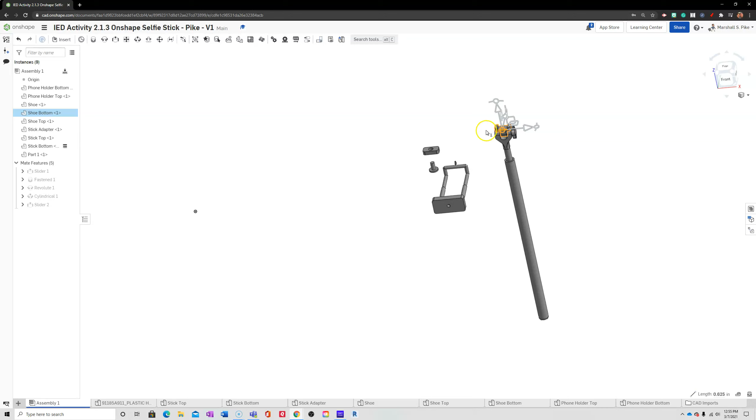We're going to put the pin into the shoe bottom, then attach that to the phone holder, and then attach that entire component to the actual phone shoe bottom up on the selfie stick. For all three of these mates, we'll use the fasten mate, basically attaching surface areas to one another. So I will turn on the fasten mate.

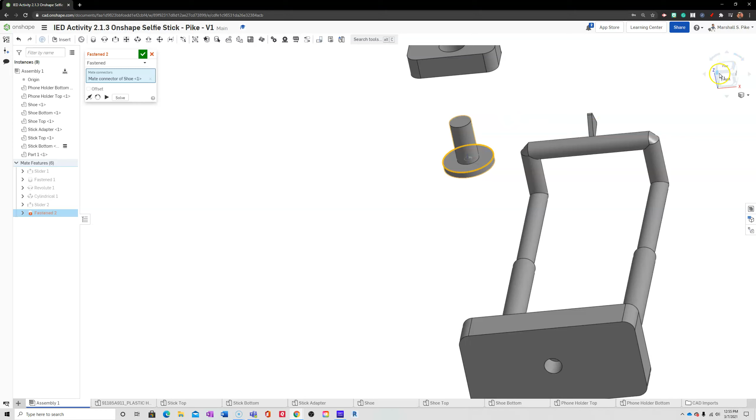I'm going to zoom in and find the pin with the bottom of the surface area, and then I can rotate my object over. Let's zoom in again, and I want to find that area, but make sure I get the surface area of that shoe bottom, not the actual hole that's inside. If I hover over that, it will attach itself and highlight for you.

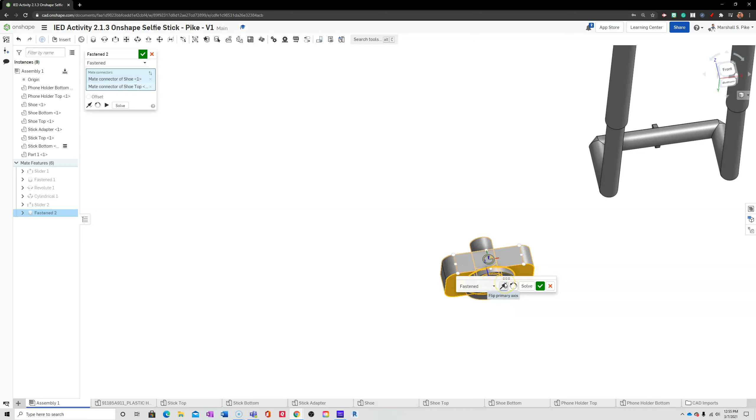Once I have that in place, for level 1 we're doing something different. We're going back and selecting mates continuously for practice. So I will go back up to the quick access toolbar.

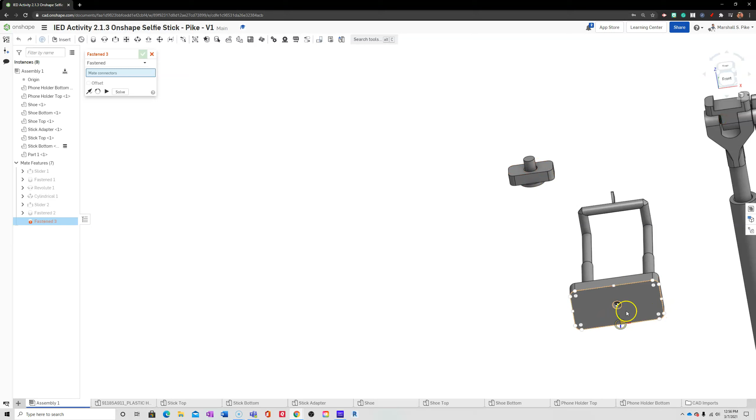I will select the fasten mate, and this time I want to put the pin that's inside the shoe bottom into this part of the phone holder. So I'm going to pick the cylindrical part, but I want it here where it's highlighting the surface area of the shoe bottom. Then on our phone case, if you hover, it should find it for you as well.

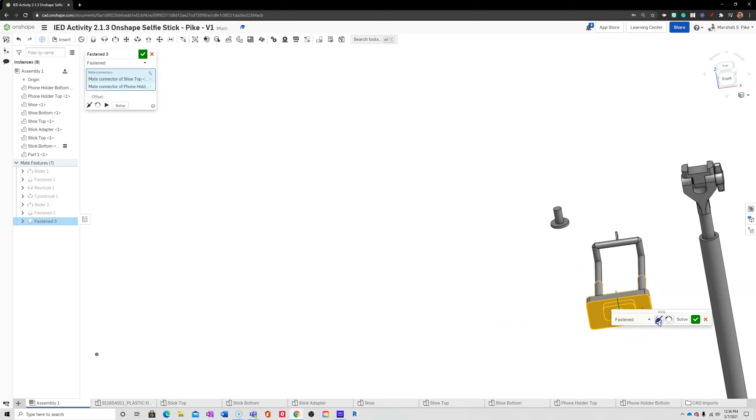And let's flip that and accept it. Now we have that entire assembly for those components put together.

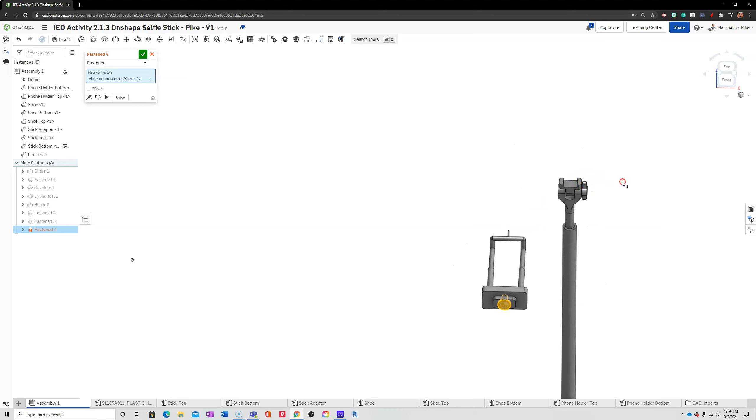The last assembly we'll want to do is, again, a fasten. This time I'm going to fasten the pin head. I'm going to hover over the pin head, find that axis, rotate around, and attach it to the surface area here of the shoe bottom that's in the selfie stick. I will hover and find that.

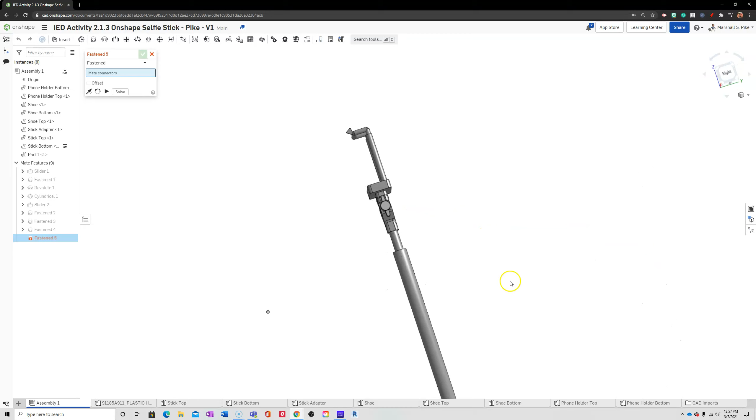Now it's only going to show you the pin to start with, which is okay, but once you flip the axis and hit the green check mark, it'll bring in the rest of that component for you. Let's go ahead and close that out. And now we have our fully assembled selfie stick.

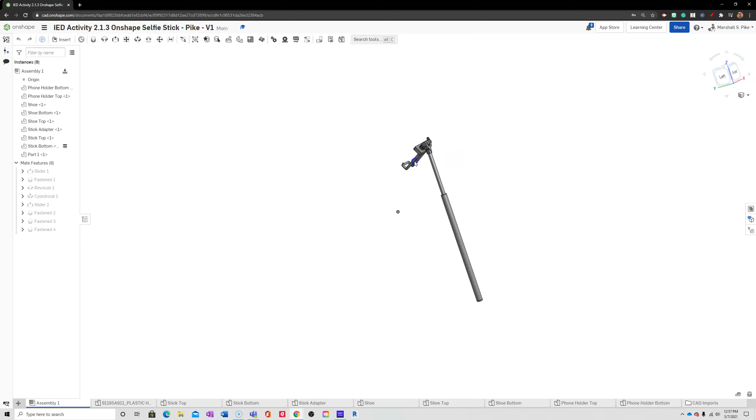So if we zoom out, the selfie stick should be able to go up and down. You have your rotation. Then we have our phone holder that goes in and out as well. And that's the selfie stick for our assembly file.